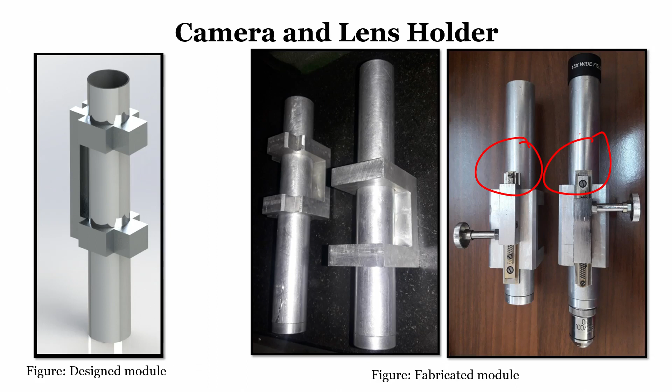Of course, it depends on the user, on how you want to create your control alignment interface, but if you see here, our right and left cameras can see simultaneously. So, how does this camera come into the picture? If you see this one, these are the camera and lens holders that we were talking about. So, left and right cameras can both simultaneously view the mask at the same time. This is the left camera, this is the right camera, and we can simultaneously look at both cameras.

Now, other than that, what is there? We can place a button, we can press open camera. When the camera opens, you can use the left camera, the right camera, and alignment control like X, Y, theta, Z for the alignment of the stage. You can click here for image analysis, and you can use this one for exposure control, how much exposure to the wafer you need to make.

You need to understand with how much UV light power you are exposing your substrate. So, exposure control: you can set the time, how much time you want to expose your substrate. It can be 5 seconds, 10 seconds, 15 seconds, depending on the material that you are using. If it is a thin photoresist or thick photoresist, if it is SU8, the time would change. So, this time can be set, until which the UV light will fall on the substrate through the mask, and then after the set time it will stop.

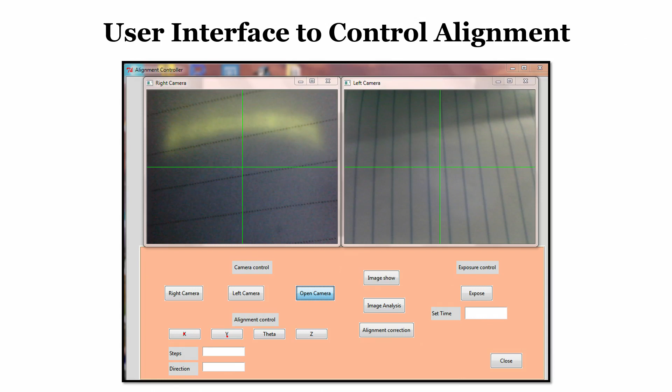Finally, there is alignment correction. So, we are trying to automate the system by alignment correction. Once it is aligned, then you can start the system. So, the point is you can very easily design this kind of user interface control alignment system to integrate with your mask aligner. Now, the most important aspect of any mask aligner would be the source, right, because finally we have to expose our substrate with UV light.

If you have seen a conventional UV mask aligner, the light source gets heated up tremendously. Also you need to change the bulb here and there. How about we use an alternative UV light source, for example UV LED? If we integrate UV LED as a light source instead of a UV lamp, we can reduce the cooling, and that will be really awesome, because you will just buy an LED array and anyone can change it easily. If the LED array goes bad, you replace it with another LED array.

If you go for a conventional UV lithography system, there is a big exposure system. You need to open it, take out the UV lamp, put another UV lamp, again close it, and there is optics and a lot of other things within the mask alignment system. Here it is extremely simple. This is what we want: to bring simplicity to the system and at the same time reduce the cost. So, the alternative approach that we are trying to implement is to use a UV LED exposure system.

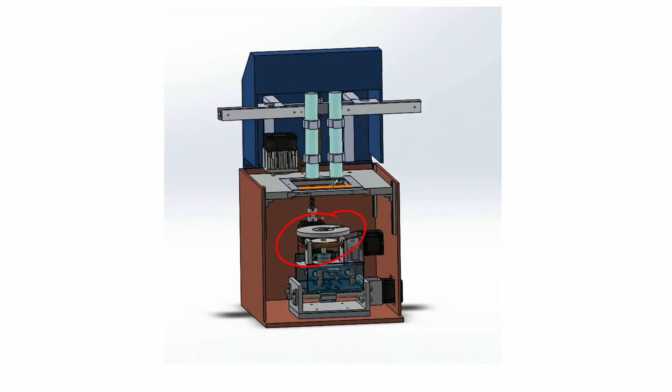This is just a model to understand the system. You can see here there is a wafer holder, and here there is a mask holder, and the wafer holder will come to the mask holder and get attached. It is hard contact lithography. These are the lenses, or you can say camera. This is the light source. So, let us play the video, and while we are playing it, I will tell you what the components and tools are.

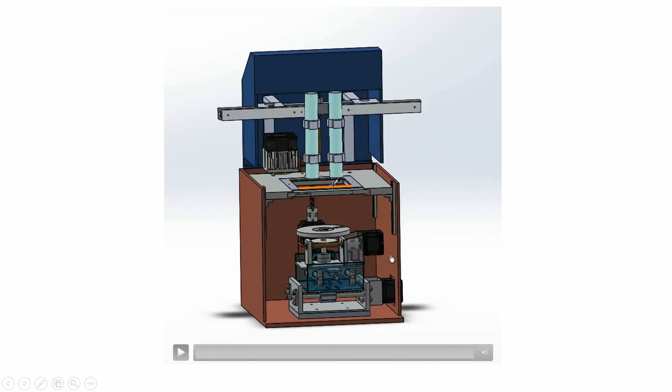These are the actuators and drivers to drive the X, Y and theta stage. So, let us see. Now we are trying to show that we can move the mask alignment stage. This is the z direction. Of course, this is a 3D SolidWorks diagram.

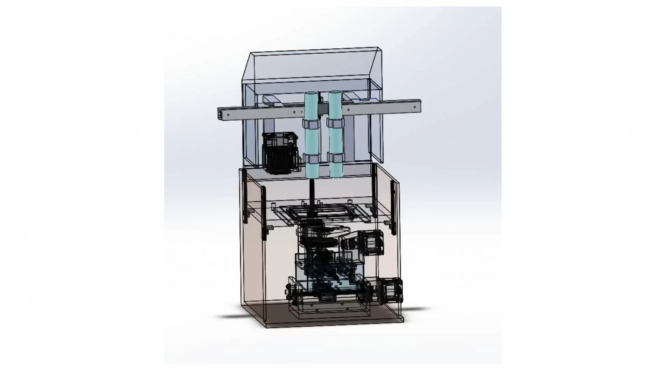This is just a temporary, or you can say a basic video to show how the system works. Now, we see when you move the camera, it can be moved in both the directions. So, when you place it exactly on this particular surface, you can see both the alignment marks simultaneously. That is the idea. Now, this is your UV source, right. So, there is a UV source.

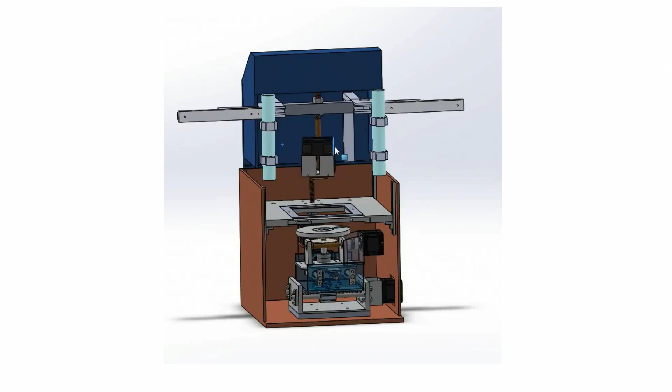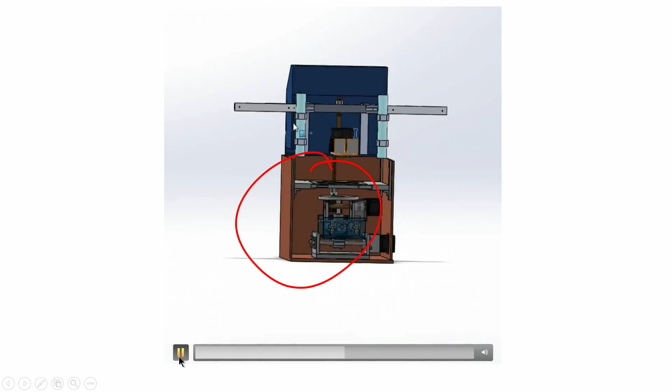It comes after you align the mask, you press a button UV exposure, the UV source will come, right, and when it comes, then you have to see what exactly lies under the UV source. When you see that, you can clearly see that there is an array of LEDs. So, this array of LEDs is directly exposing the mask, and under this mask there is a wafer over here that will get attached to the mask, and then the exposure will happen. So, this is another thing.

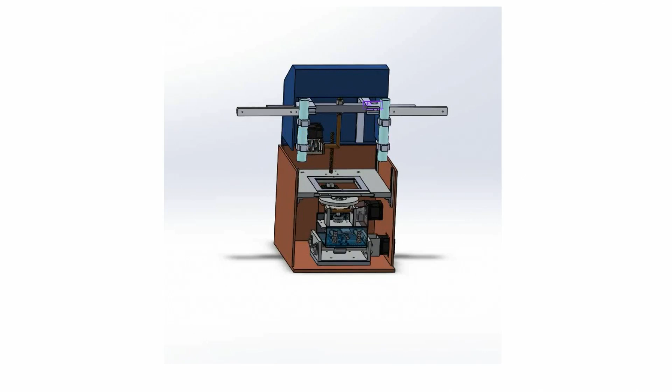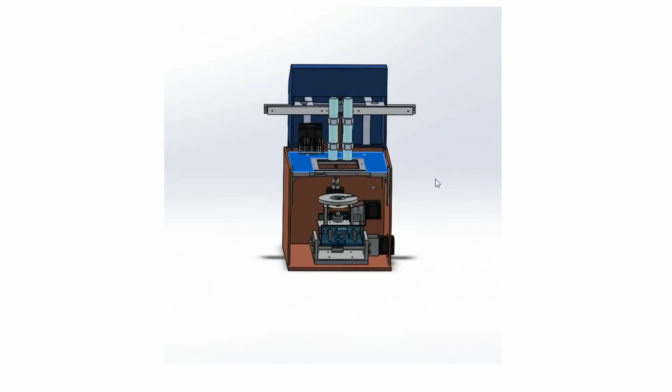After the exposure is done, right, you need to keep the source back. So, the source will go back, and if you see this, the lamps will come back after the things are done, back to its reset position, right. And then, once the things are done, everything will be reset to its original position. This is just a simple box type mask aligner system.

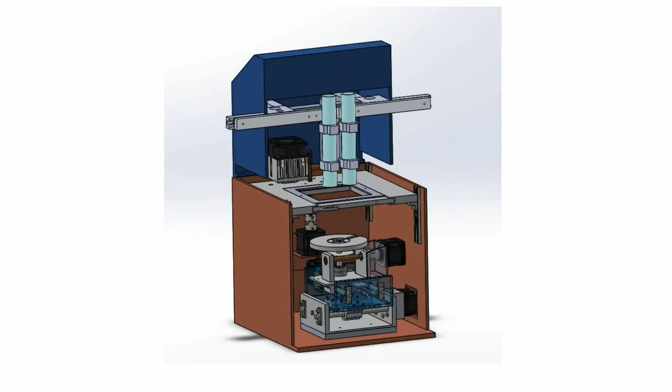You can see its simplicity, right, and we want to see whether we can obtain similar features which we can get through costly equipment, or close to features from a costly equipment. We have not tried the minimum feature size in this case. However, we assume that we can get close to 5 microns very easily.

So, my idea of showing you the entire mask aligner or whatever we have done is to help you out, to encourage you that you guys can do it in your laboratory, in your college, right. You do not have to have a hi-fi laboratory, a hi-fi technology next to you to start working on your research problem, right. Yes, if you have it, excellent. If you do not have it, create one, right. Make a system in your department, make a system in your university, make a system at your home, right.

If you really see that, technology development comes not only when you have hi-fi equipment surrounding you. Technology development can come when you have novel ideas, right, bringing them together and working on a prototype. Then from prototype, when it works, you can convert it to a product. So, anyway, point is that don't always think that if you do not have certain facility you cannot perform research, right. That is why I am showing you an alternative technology.

Even I am in the institute where we have one of the best facilities that a micro engineer would like to have, right. We have everything to name, from a photolithography unit to reactive ion etching to wet etching to dry etching. We have e-beam evaporation, sputtering, right. We have XRD, AFM, SEM, TEM, you name it and we have it. But what about if we do not have it, right? If we do not have a costly mask aligner, we can create one. That is the idea, just to show it to you.